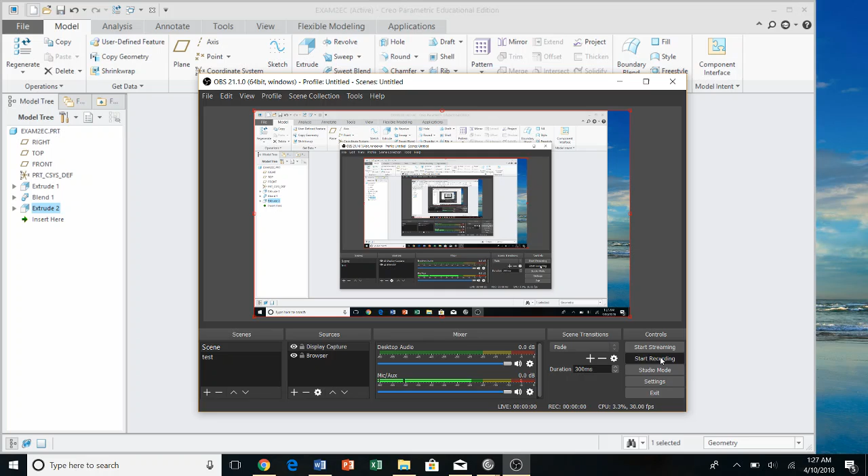To start, we're going to make a new part and call it the main body. We'll uncheck the default template and hit OK. It's an inches part solid, modeled by me, Joseph Telegadas. The description is main body.

To start, we're going to do an extrude. We'll click the top datum and bring it to sketch view. This will be the bottom of our main body, so I'll start with a circle, draw it, hit escape. That looks like it has a diameter of 5, so I'll dimension it correctly. There's a thickness of 0.5. That is good.

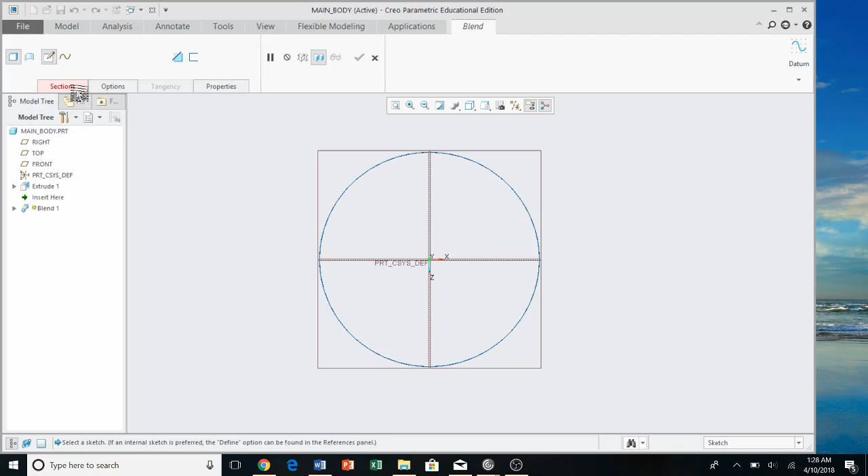Next is the blend, which is a hexagonal blend. We'll go to Shapes, Blend, hit Sections, and to define this item we'll click the top of this circle. If we go like this, it looks good. Hit check mark, cancel, yes.

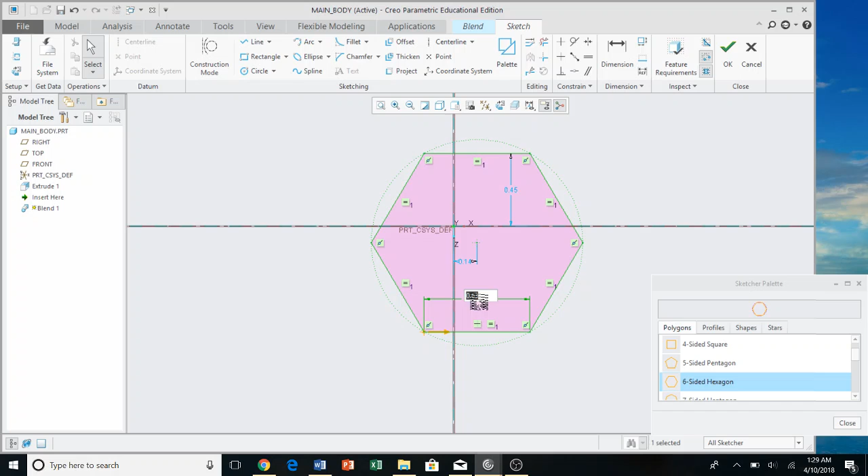In sections, we'll click Define, take the top, hit sketch, and bring it to sketch view. Then go to palette, click and drag this 6-sided hexagon onto here, hit check mark, zoom in, change this dimension to 1.5, change this other dimension to 0, then hit dimension, click the center, control click the axes, and middle click the mouse, type 0, which will center our hexagon.

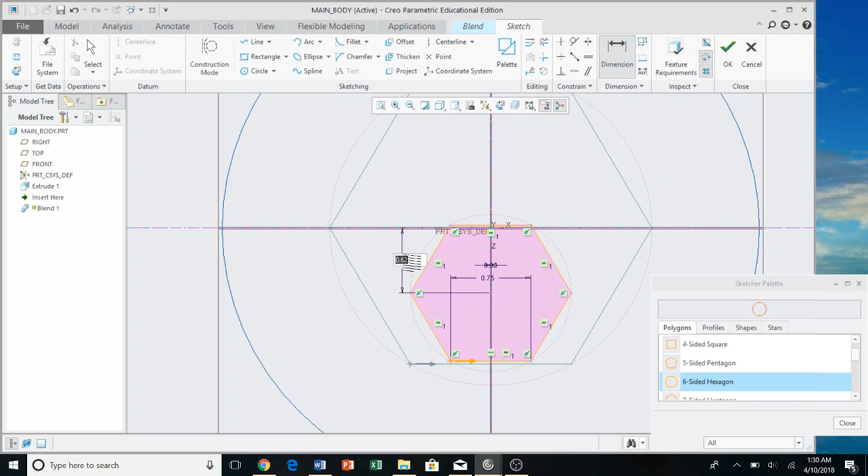Click OK. Now go to sections, section 2. It's offset by a distance of 3, to the center cross section. Hit enter, hit sketch, and again go to palette, 6-sided hexagon, click and drag, hit OK, dimension this to be 0.75, click OK, change this dimension to 0, hit dimension, center, control click the axis, middle click, 0. Check mark, that's looking good.

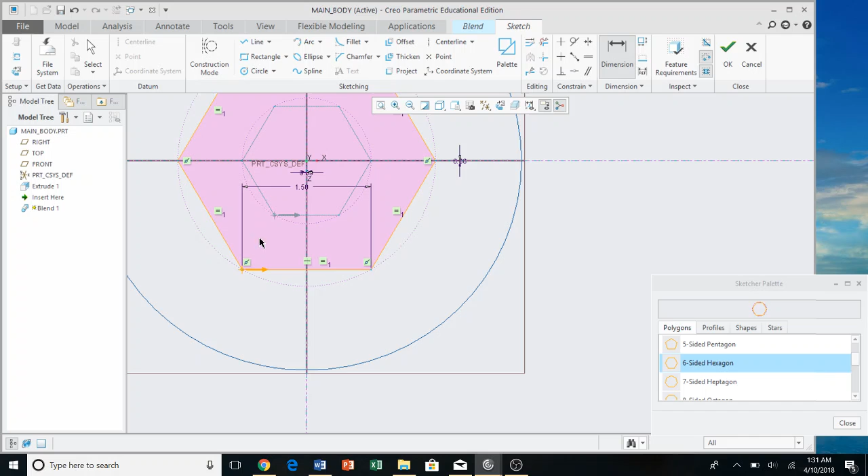Lastly, one more time: sections, insert, section 3, distance of 3, sketch, sketch view. That is weird. Palette, 6-sided hexagon, click and drag, check mark, again 1.5 as it's on the other end, this dimension 0, dimension, center, control, axis, middle click, 0. Check mark, good, okay. That blend looks perfect.

From here we're going to do another extrude. We'll click this top surface, bring it to sketch view. I'm going to add some references, reference this, hit close, and also add some center lines, just in case - always good to have. Click circle, come here, make it even with this circle, check mark, and the distance is 0.5. This will be our top end cap. Click OK.

Now I'm going to do a revolve. We'll select the front datum, bring it to sketch view. Now I have to add a center line - I'll right click and hold and designate this my axis of revolution, hit OK. Now I'm going to hit line and start at the bottom, hit escape. This has a diameter of 1 for that center hollowing - that's what I'm looking at.

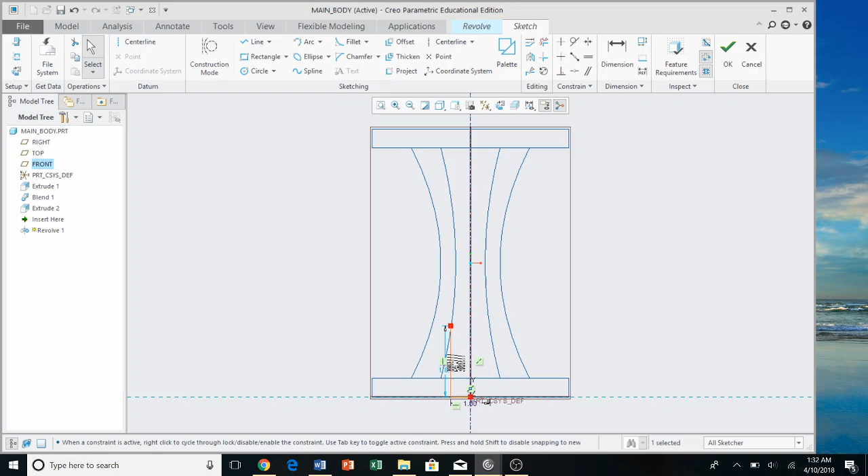Add another line, come up, hit escape. This has a distance of 2, because it's the 1.5 distance plus the 0.5 for the circle. Check mark. Another line, come in, click here, come up here, hit escape twice. This has a radius or diameter of 0.5. This has a length of 2.5.

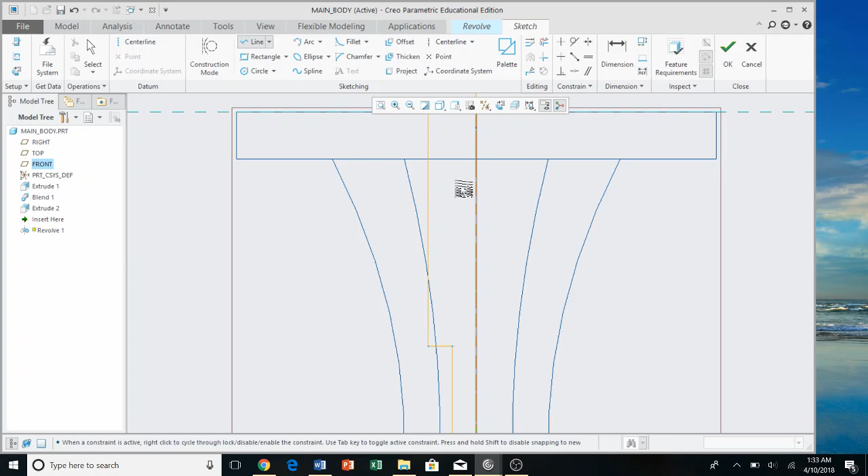Then we'll come up here, zoom out a little bit. Line again, we'll come back out, go up here, click, then come back to the center line, hit escape twice. It's 2.5. Dimension this - that has a diameter of 1, looks good. I'm just going to check this length to make sure it's right, and 2.5, so it looks good. Undo and get rid of that.

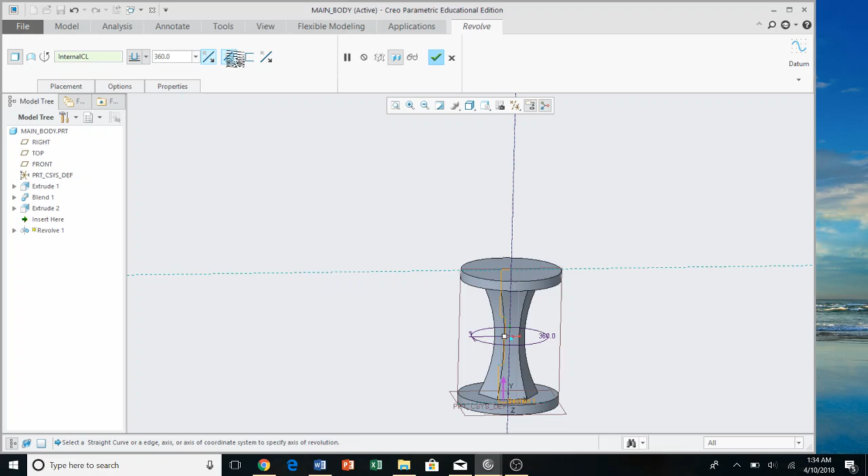This looks good, we're going to hit check mark. Let's see if we can get some shading - hit remove material, and that should make it. Looks good, check mark, okay.

Okay, so we've got to do one more revolve to make that divot in the top and the bottom plate. Again we'll go to revolve, hit placement, click this front datum again, bring it to sketch view. If we look here, the divot - we're going to go to no hidden lines. Actually, I'm going to cancel this, yes. I'm going to do the rounds first so we can see where to create our divots.

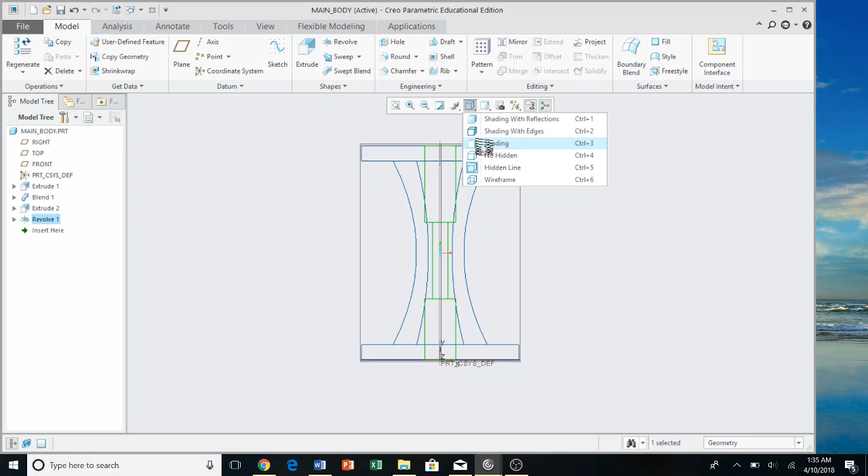So the rounds are very simple. We'll put shading back on, chamfer, shading with edges, click round, and we want the round to be 0.5. Again we'll click this edge right here - not that, it's not right at all. Now we're going to change this to 0.25.

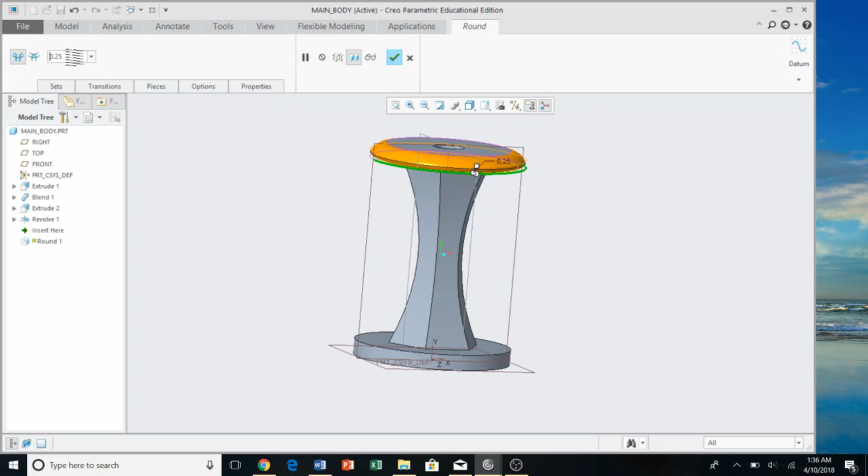That top one doesn't look good, so I'm going to cancel that. I'm going to hit round again, 0.25, and make sure to click this edge right here, and this edge right there, and down here, this edge, and this edge. Alright, that looks good. Check mark. Alright, cool, that looks good.

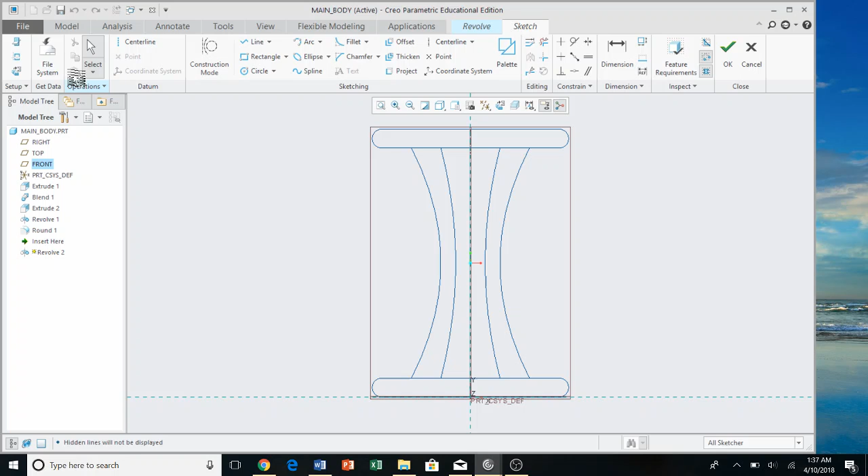Like I said, we're going to do that last revolve for the divot. So click revolve, front datum, bring to sketch view, no hidden lines. And then the divots are at the top and the bottom, and they look like they have a 3.5 references.

They are radius. Here, come up here, here, and click down there. And close that. Hit escape.

Ooh, and we have to right click on this center line. Actually, add center line. Designate this the axis of revolution. Okay, alright.

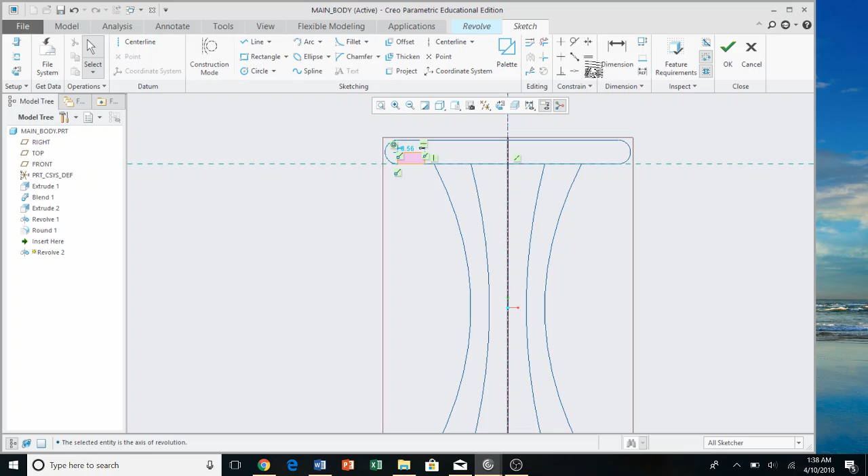So the inner circle of these divots should have a diameter of 3.5. Down there. And this should be 3.5 for this diameter.

We're going to delete, delete, delete, delete, and then redraw this box here. We're going to start here, go up to the center of this round, come over here, come down, and then come back over, escape twice, and now we see that that is even with this one here.

If not, you could dimension it and make sure the distance to the center line is so it has a diameter of 3.5, but we should be good.

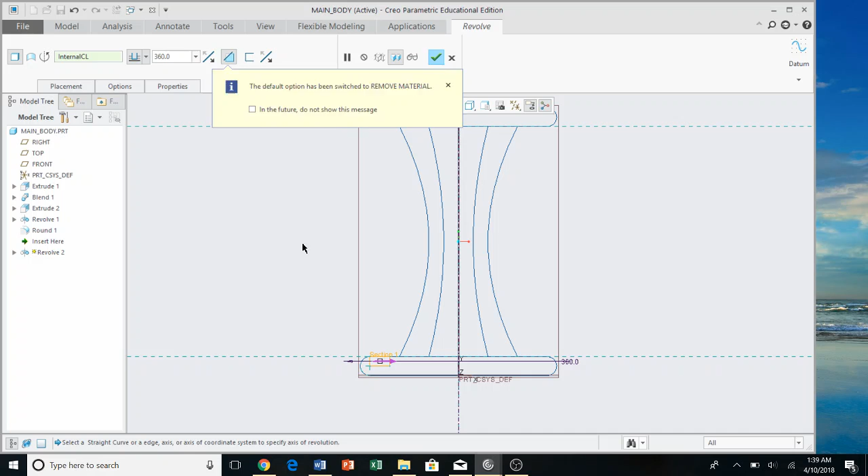Click OK. Default option has been switched to remove material, so let's turn on shading to make sure this has a good look, and that looks like what we want. So now we're going to click OK.

Alright, so a couple last things for our engineering drawing. We have to add some planes to do the revolve view. So we're going to go to View Manager. Actually, we're going to go to

Plane, the datum plane, and we're going to click the top datum offset, and we need one at the center, so that is going to be 0.5 plus a distance of 3. Looks like, trying to see on the drawing here. So 3.5. Click OK. That looks good.

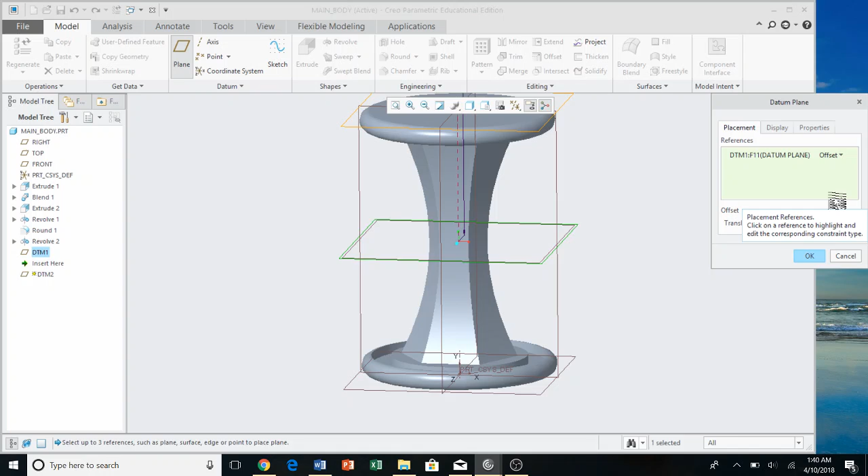And then plane, and then it's going to be offset from this datum, but it's going to be a distance of 3. Okay, there we go. So we've added our two planes to do our revolve views, and now we're going to add the section to do the quarter cross section.

So that is section AA. So what we're going to do, we're going to click View Manager, Sections, New, Offset. We're going to call it A. Okay.

So we're going to select the top as the sketch plane, hit sketch, bring this to the sketch orientation, no hidden. Alright, and we're going to draw a line from here to the center and out, and hit escape, hit OK.

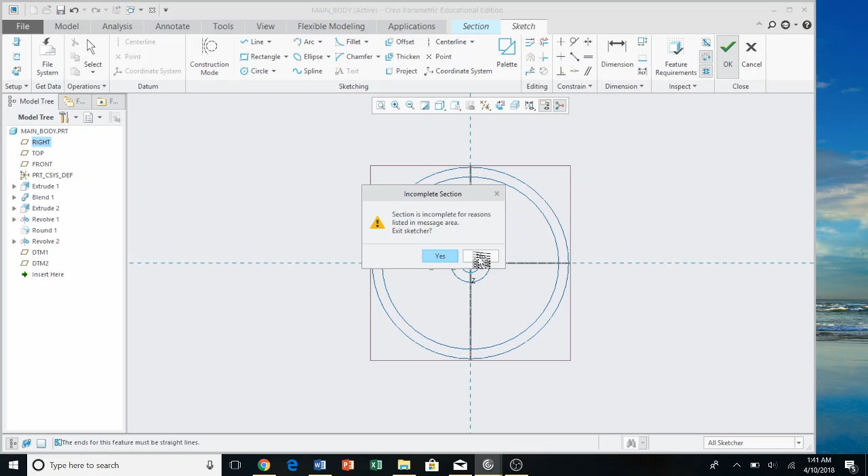Okay. Alright, now we have that, but we want to reverse the direction, so we're going to click this here. And that looks good. We can see we have our cut just like in there.

And click OK. And now we're also going to create a new orientation for this, so that it matches what we have on the engineering drawing.

So we're going to rotate it like this, and then we're going to hit Orient, New, and we're going to call this Section View. Enter, okay, and hit close.

And now this is the main body completed. So we're going to hit save, and that'll be okay there, saved in that folder, click OK.

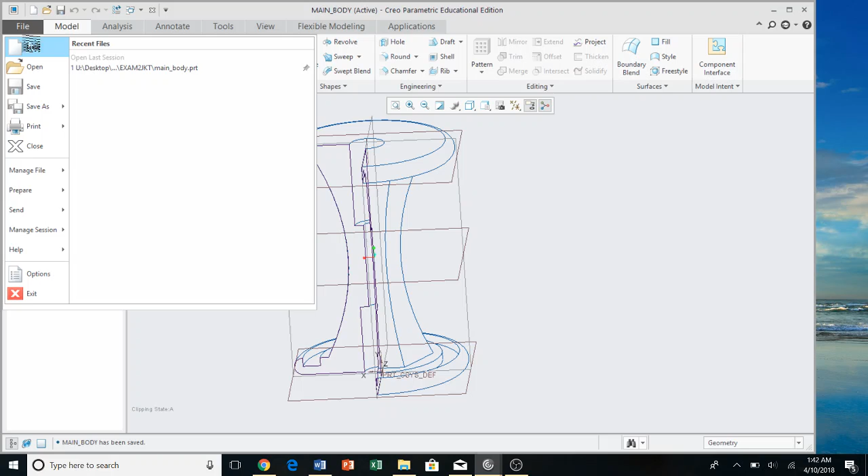File, new, drawing. We're going to call this main body. Uncheck the default template, hit OK. Empty with format, browse. And if we go to our working directory, select the Spring format and hit OK.

Alright, so now we have to get our general view. Alright, general view, OK. And we're going to click somewhere down here. This looks good. We want the front, apply.

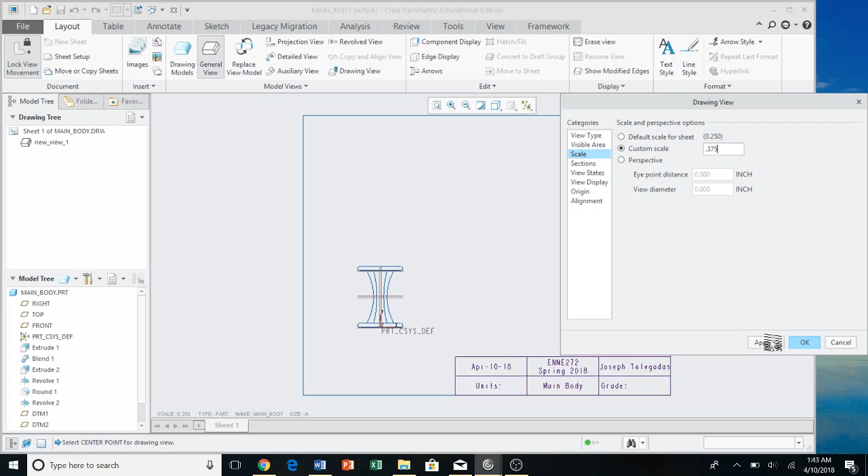OK. If we go to scale, custom scale, 0.375 should do. Apply. Okay, we can uncheck. Actually, we want to leave this checked right now. Alright, we want to add hidden lines and repaint that.

Alright, and then go right click, projection view, come up top, and we can click, and we have our projection view.

From here, we want to add general view. Okay, click again. And this time we're going to do our section view. Apply. Then we're going to go to sections.

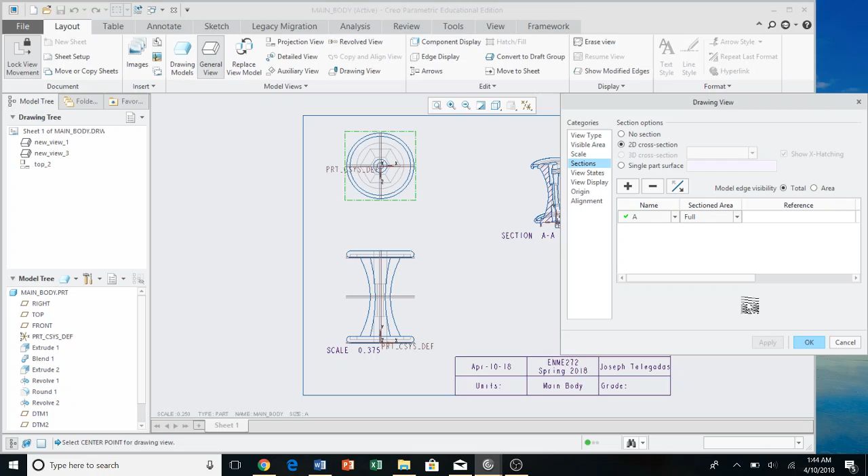Sections, add A. Okay, apply. And that is the inverse of what we wanted. We can hit that and change it and click OK. So now we have that section. We might change that view a little bit later. Oh, and right click, properties.

Make the scale 0.375. Apply that. Okay. I'd like to see, and this should also have no hidden lines on it. So if we go here, view display, no hidden, apply that. And then if we go to view type, let's look at the default.

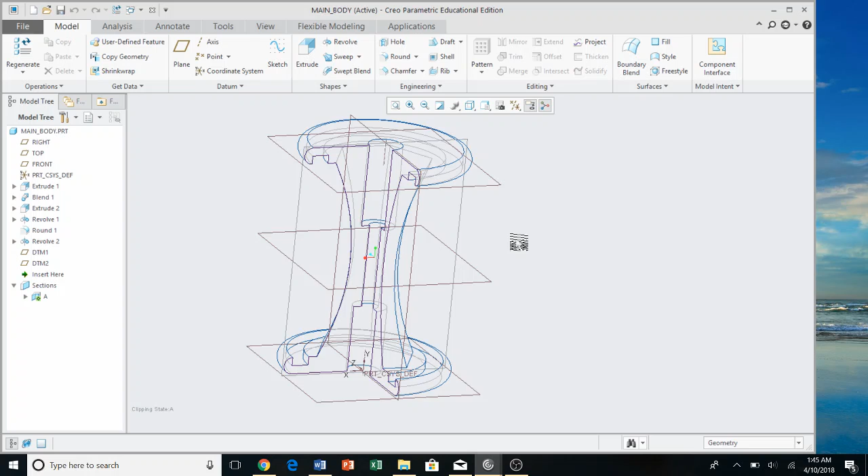No, that's not good. Alright, so we're going to go, okay, so we're going to come back to our part, and we're going to rotate it a little more. Try and get this to line up a little bit better with what's on the test. Okay, that looks a little better.

View manager, call this new section. New. Hit OK. Close. Save. Alright, come back here. Go to the main body. Right click. Right click. Properties. Section new. Apply. Alright, that looks good. Okay. Alright, so now we have this.

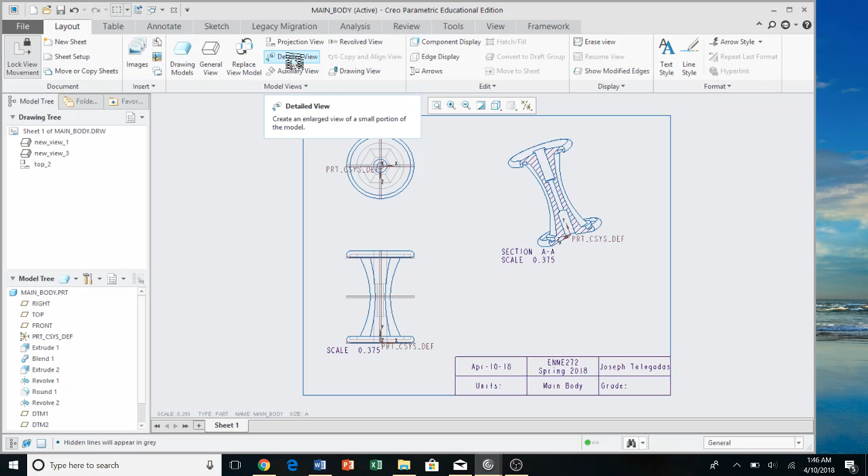So we're first going to add a detailed view. This is detail A, so we click that. And click the center point, which looks to be about here. And then do a bunch of small clicks and draw a circle around this. And hit enter. And middle click.

Yes, finish the spline, right click. Yes, finish with the boundary definition.

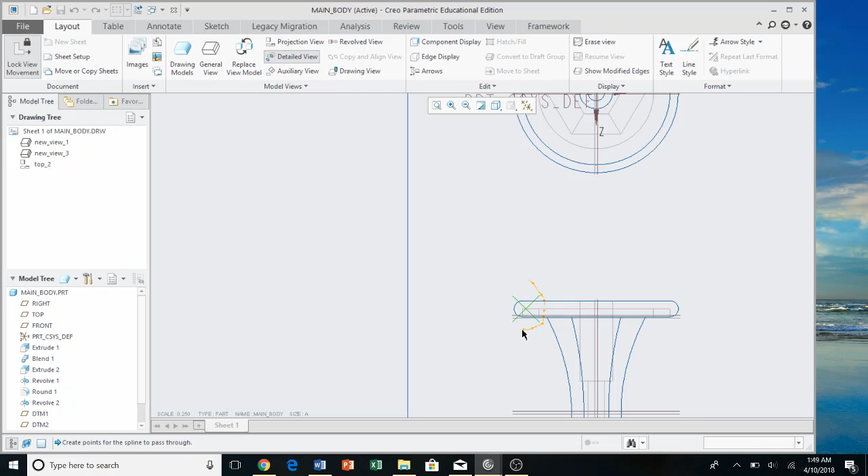And that looks like we cut it, so we're gonna delete that, and we're gonna try that again. So we're going to center click where we want our detailed view to be. Draw a circle around to make sure we get that divot in there.

Middle click, and then click over here for our section A, and that looks good. Section A, and then we want to go to properties and change this scale to 1.

Okay. All right. And we can click unlock movement. We're gonna move this over a little bit so that we can get that detail on the page. And we can move this up a little bit. All right. Okay.

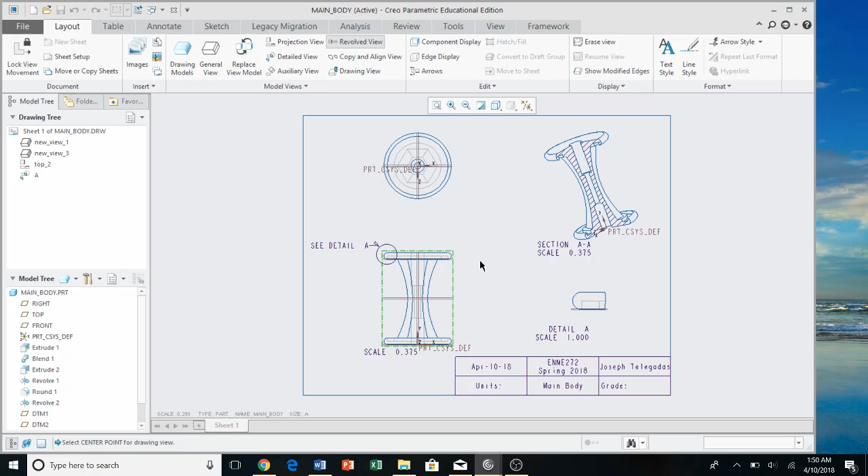Now, the last thing we're gonna do these revolve views. So we're gonna select this as the parent view. Select this as the center point. Revolved alignment reference. Planar, single done.

Name, cross section, we'll say B. Plane. And we want to click this plane that we created, and there's the 1.

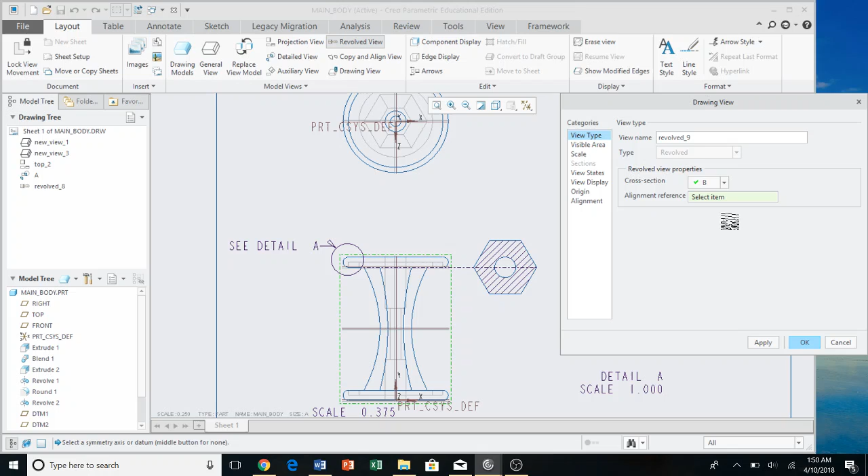Okay, and then do one more revolved view. This is the parent view. Select center point for the drawing view. Cross section. Create new. Planar C. Done. Type in C. Hit check mark. Plane. Click this one, and there we go. Apply it. Okay. All right.

From now here, it's just a matter of doing some dimensions. So if we go to annotate, dimension, also we're going to get rid of these. We don't need them anymore. Dimension, so this, 5, middle click, orientation, change this to diameter, and then change the display. Flip these arrows. All right, looks good.

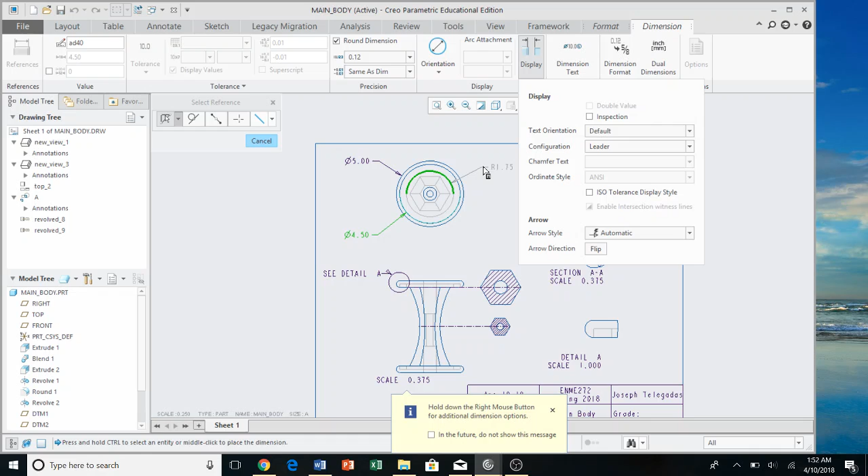Next thing we can do is this inner radius right here. Same thing. Click diameter and flip these arrows. All right, and the last one is this radius right here. All right.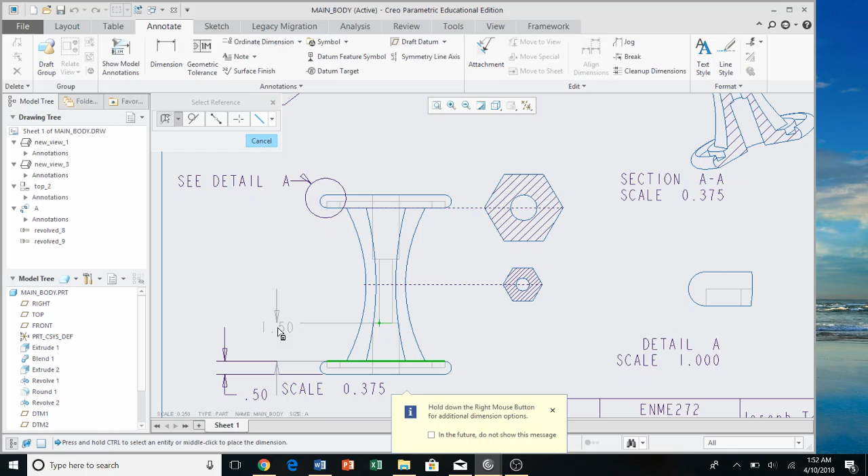There. See. Cancel. Go back. Hit dimension again. I'm gonna do and come over this down. Middle click, that looks okay. Now this side to this one. Yeah, misclicked. Alright. This to this 1.5 right there.

Display, flip these arrows. This to this. And this to this. Alright. What else do we have to do?

Dimension this side length. 0.5. Flip these arrows and this side length. Looks good. The center.

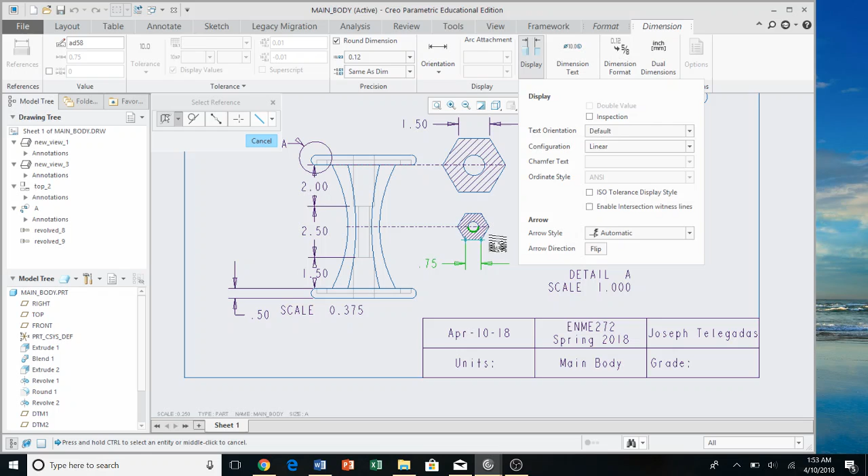Alright, sorry. Dimension the center. Then of course we want to make that a diameter and flip the arrows again. And same with this one. Alright. That looks good. And the last thing we have to dimension is on our detailed view.

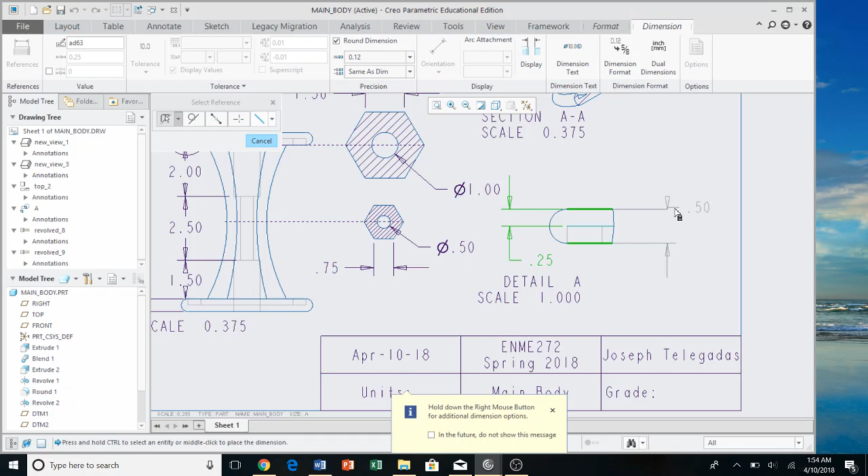So this length to control, click this one. This entire thing. I want to flip those arrows. And then dimension the last part, which is the round. Alright.

And then the last thing it looks like we need to do is add our center lines. So if we go to, cancel that. Alright, if we go to annotate, show model annotations, click on this thing, come over here, and we can add one of these center lines, click apply, cancel. And now we can click and drag this and make it go through our whole model.

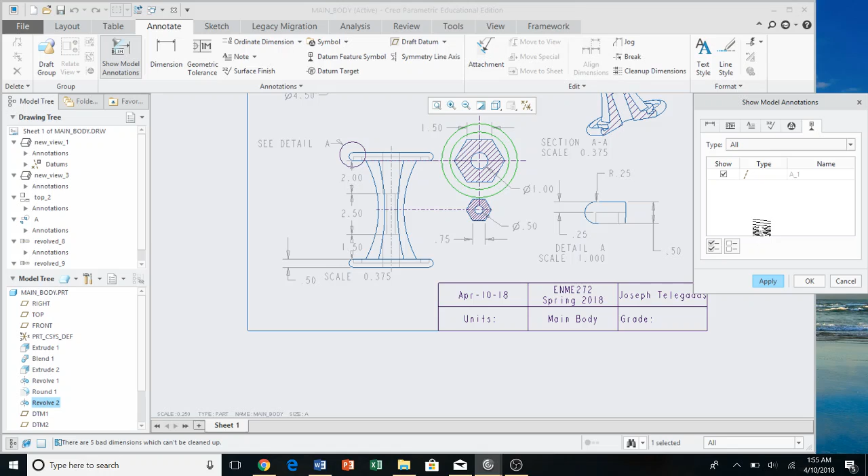Show model annotations, click on this thing here, add this center line, apply, cancel, shorten these a little bit.

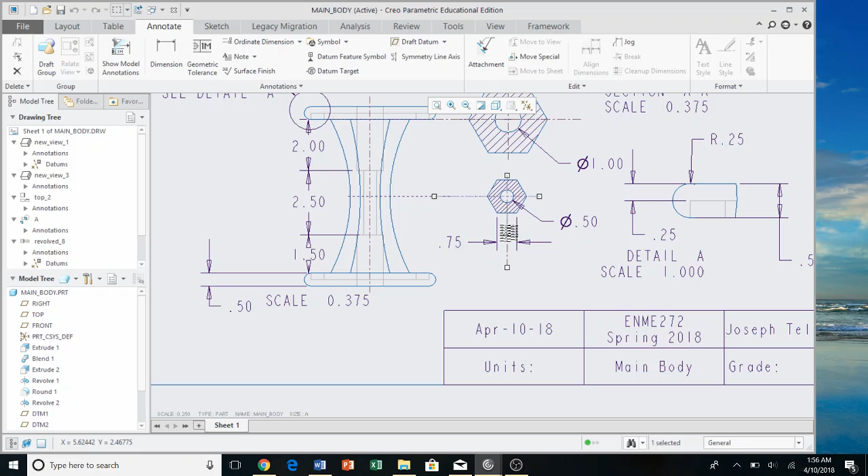And then show model annotations, click on this one. Apply that. Okay. And again, shorten it a little bit. Also going to shorten that a little bit too.

Alright, cool. Alright, recenter, and then we need one more center line on this one. So you know the drill. Check mark, apply, okay. Alright, that looks good.

Alright, so this is all for problem 1. It's the main body. We're going to save main body drawing. Okay. Alright, so now we have to make the second part, which is going to be our spring. So file, new, part. I'm just going to call this spring. Click OK. Alright, and then we want to recheck all these so that they're displayed.

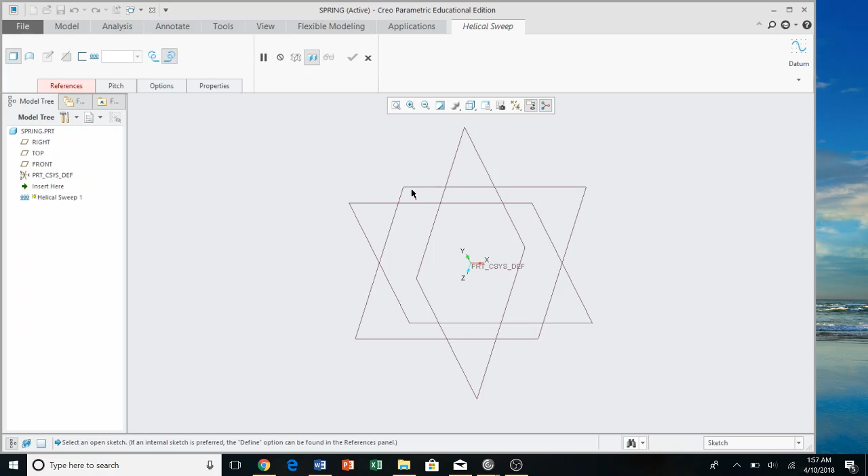Alright, so for this one, we are going to click sweep, helical sweep, references. I'm going to select references, define this datum, bring it to, and hit sketch. So we're sketching on the right datum. All right. So now section has been rotated.

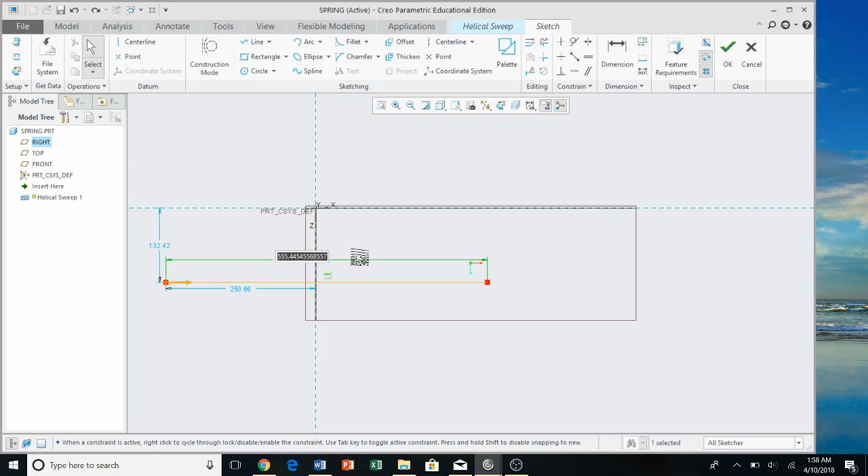What we're going to do is sketch a line. So we want it to have a length of 6, and this is going to be the trajectory for a helical sweep, with a radius and a length of 6.

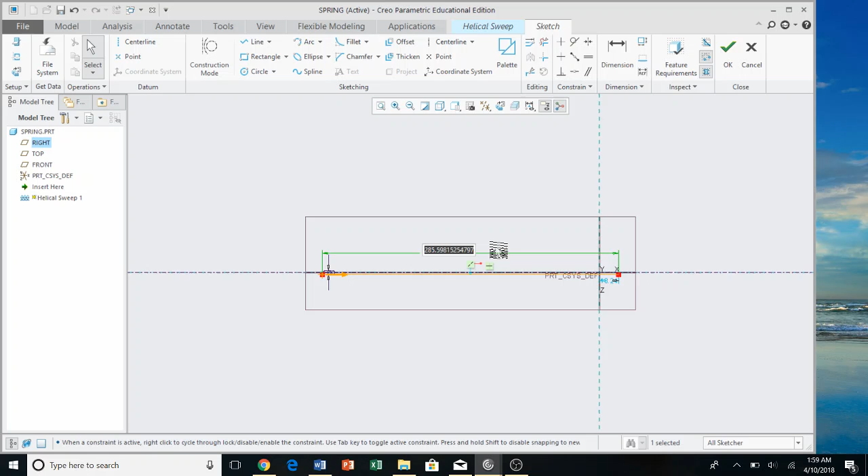Alright, so we're going to references, define this reference plane again, the right plane, and hit sketch. Designate an axis. We're going to make a center line to designate it as the axis of revolution, then sketch a line. It needs to have a diameter of 4, a length of 6. Make this 0. Click OK, and this is the path that we're going to follow.

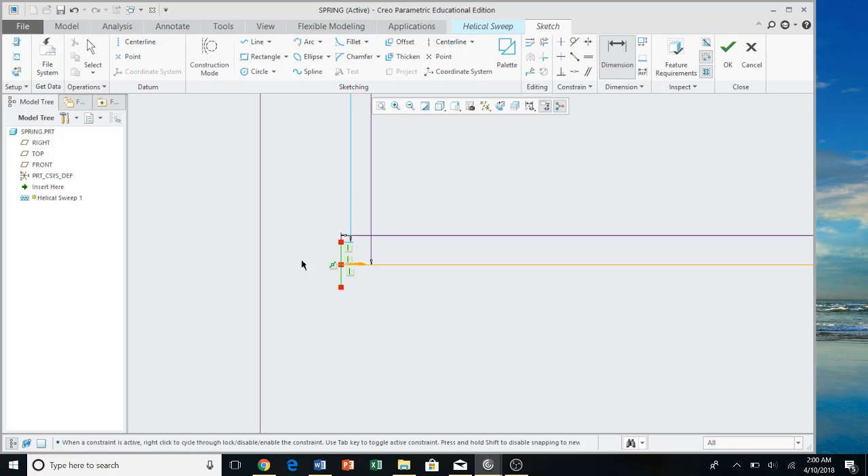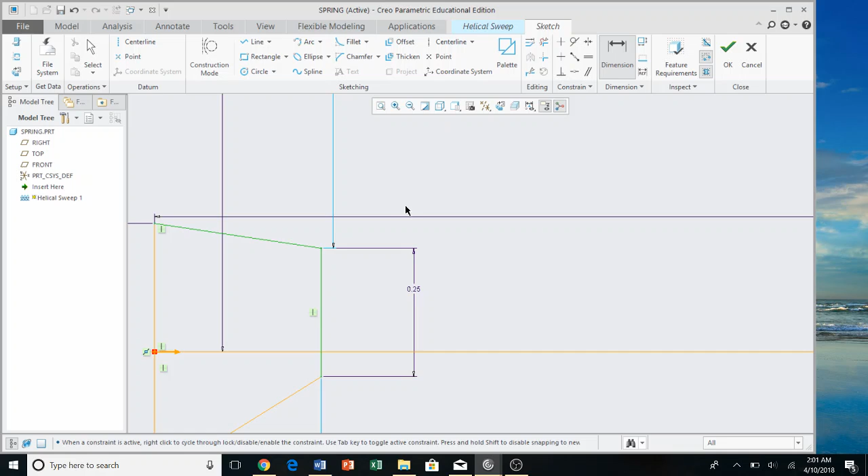Okay, and our line is going to be, dimension this, 0.5, and another line right here. Dimension this one to be 0.25. Then we're going to connect them, and we're going to dimension this angle so it's not going to be 110, so it's going to be 180 minus 110.

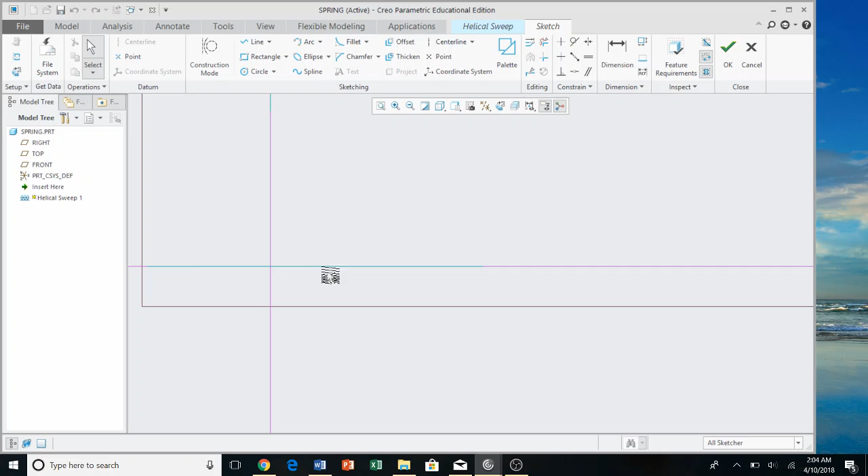Trajectory starts right here. So what we want to do is create a line that is 0.5, a trapezoid. I'm going to close it and hit escape, escape.

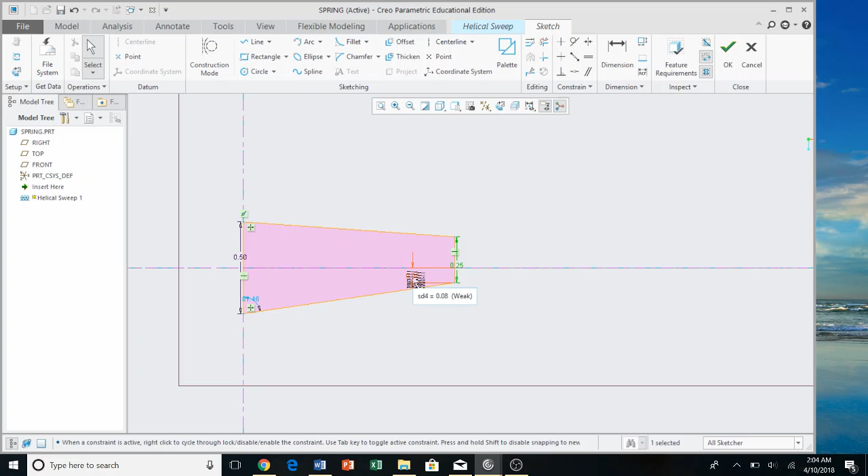Alright, so now we have some math to do. So this is going to be 0.5, and this is going to be 0.25, and this is going to be, looks like it's going to be 0.125.

And then from here we're going to dimension and make this—alright, so if that is 110, that's going to be 70 degrees. And that is the right cross section. So we're going to click OK, and now we have our sweep. And it looks right. Alright, check mark.

Okay, and we're going to save this, and we're going to call that spring.

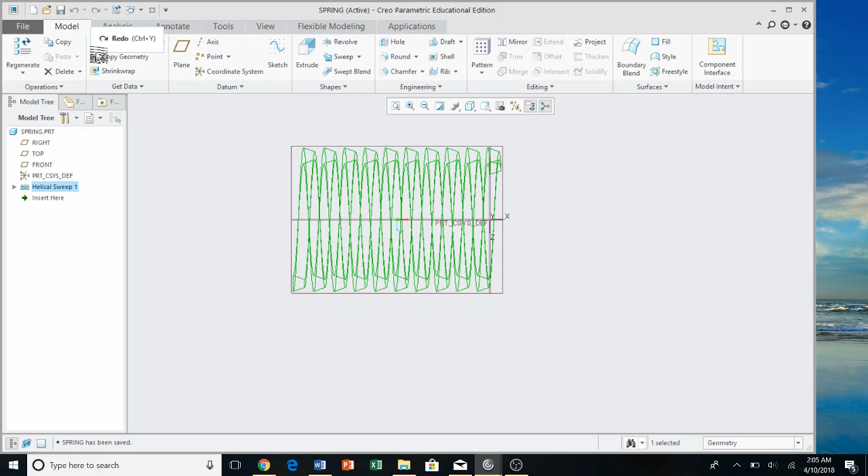So now we have to make the assembly, which is not hard at all. So we're going to do File, New, Assembly, name it Exam2ASM. Don't use the default template, click OK. Modeled by, again, my name, Joseph Telegadas. And description, Exam 2. Okay.

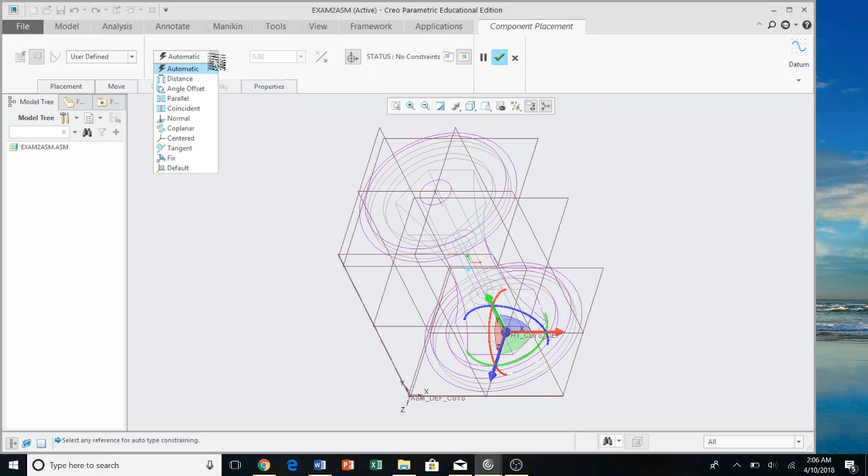Alright, so now we are going to click Assemble. We're going to bring in the main body. And this assembly isn't too hard. I want to have this fully constrained. I'm going to go fix. Check mark, okay, and then assemble.

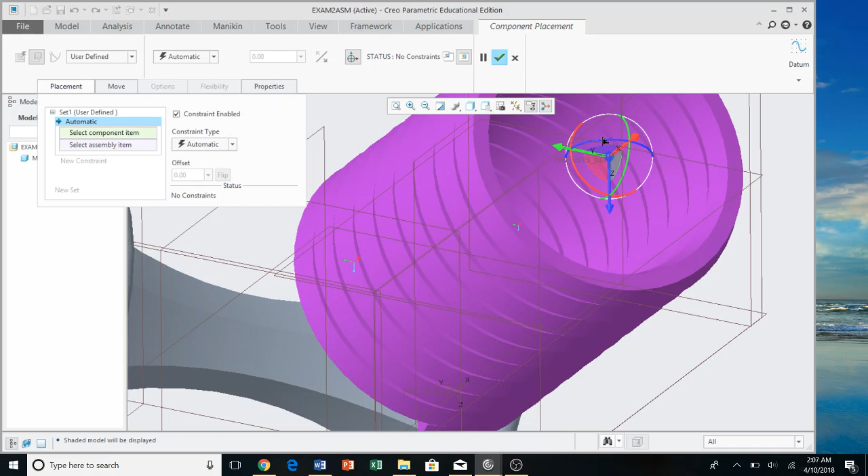Spring, open. And placement, select component assembly, so we're going to go here. Let's find—I'm just trying to see it. Center line, center axis of this thing. Alright, so I'm going to click this plane, this plane, I'm going to make them coincident, and make a new constraint.

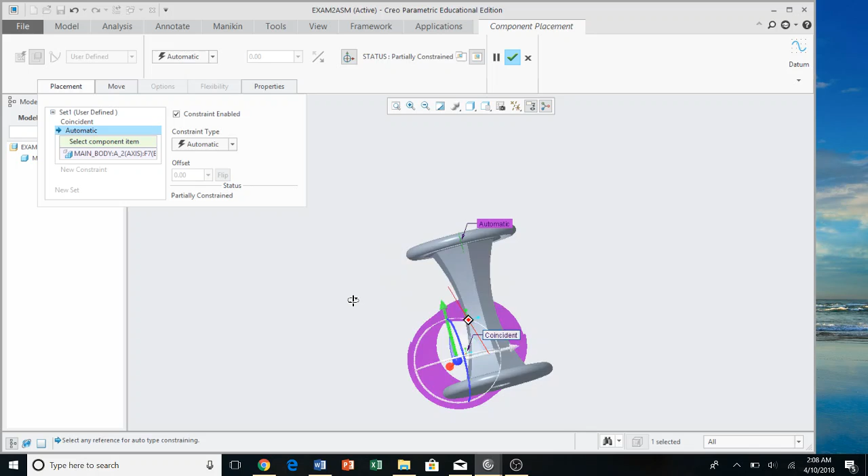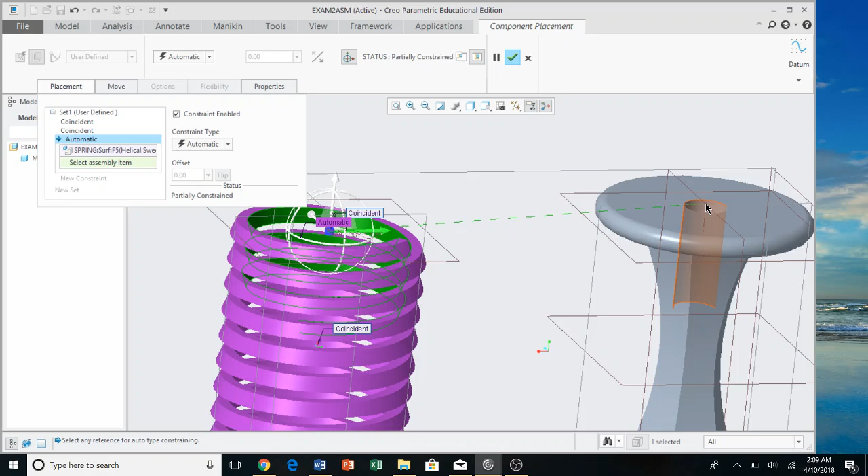Plane, this plane, that's a coincident. And then the last thing, constraint. And click the, get this axis. I'm going to cancel this.

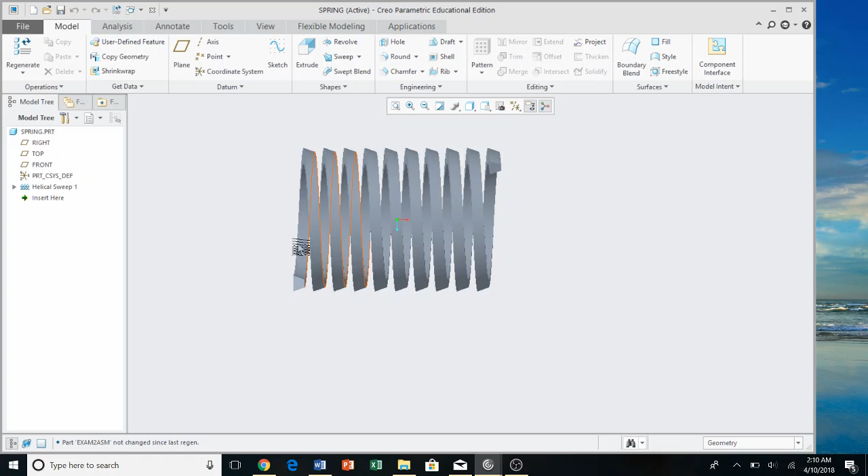Alright, so I need to get the axis on my spring. So if I'm going to open up my spring part, the axis, I go here and select all references. Click this one, and control, and click this one, that axis. Okay, and now that adds an axis there. So if I save that...

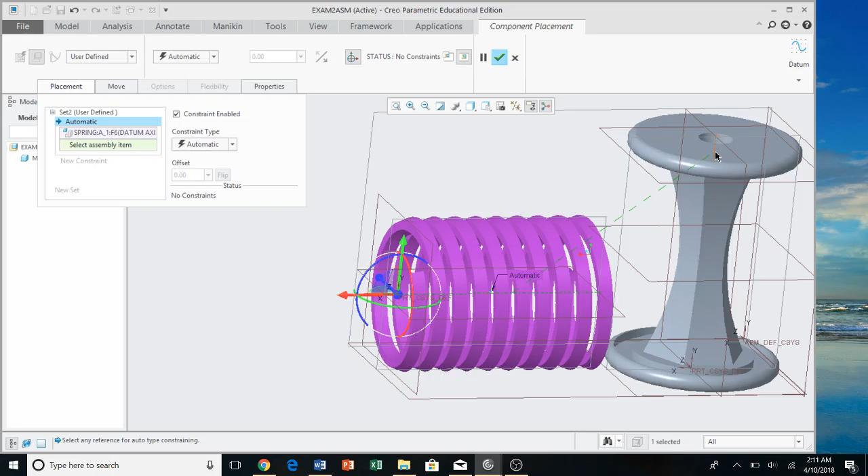And now I go back to my assembly, and I add a new component. That has an axis there. So now I can click placement. Alright, so now I'm going to click this axis, and this axis, and I'm going to make them coincident. And then I'm going to make a new constraint. Click and drag this and line it up.

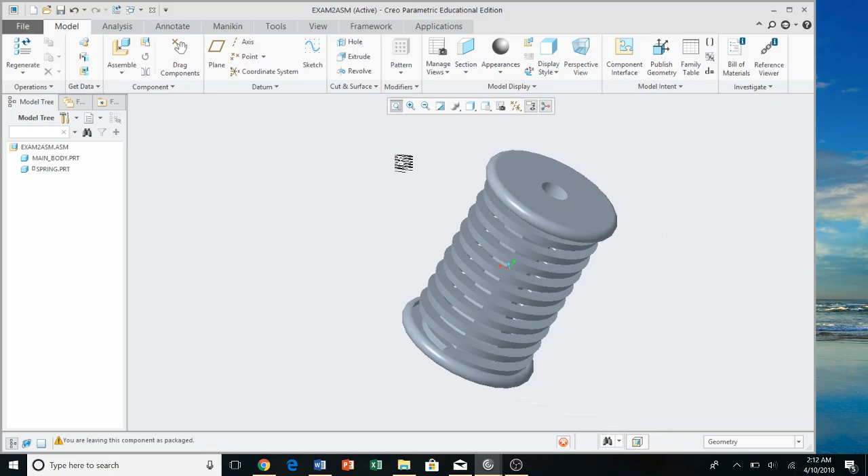And if we look at our drawing, that looks good. The spring is supposed to be inside. Check mark that. Alright, and recenter.

And now we're going to save this orientation for our drawing. So if we go to View Manager, Orient, New, call this Assembly View. Hit...

Okay, hit close. Now we also have to do the exploded view. If we go to Edit Position on the exploded view, we can click on this, drag it out, recenter the screen, drag that a little more, drag this down some. Hit check mark, default explode, save that, okay, update default.

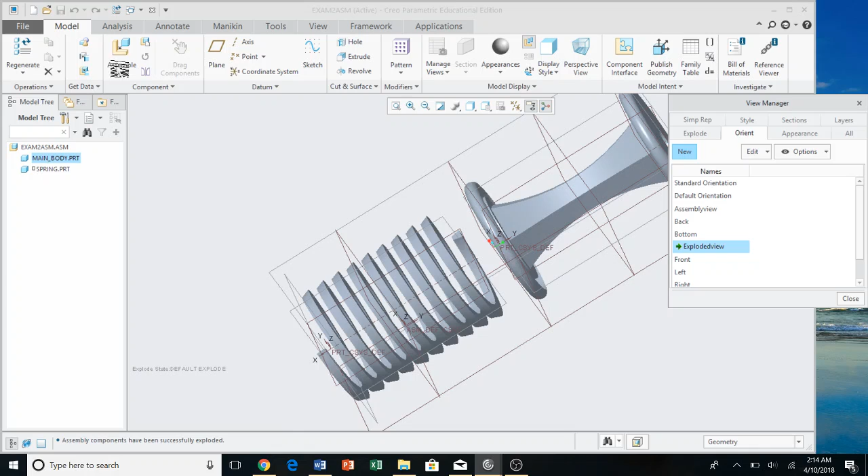Alright, and then go to orientation, save this assembly view, okay, then new, this will be called exploded view, and hit close. Alright, oh, cancel, and hit enter. Alright, cool. So now close that. Alright, and we can hit save.

Alright, and save that. So the last thing we're going to do is go into our individual parts and add parameters so that we can create our bill of materials when we go to our drawing. So if we go to our main body part, go to model intent, parameters, and it looks like we have to add part numbers.

So add, I'm going to call this part number, and we are going to do string, and then for the main body it's A001. Hit check mark, click OK.

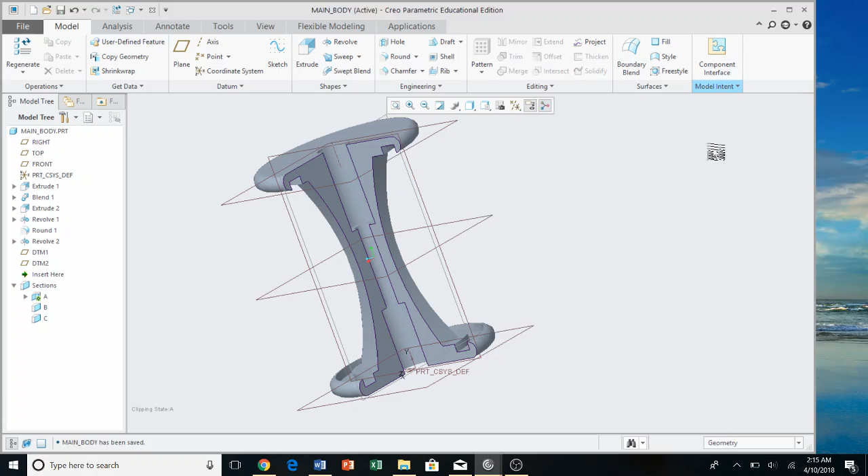And then we want parameters, add part underscore name, again string, and this is main body. Check mark, okay. And come to our, oops, my bad, close that.

Come to our spring and do the same thing, model intent parameters, add part underscore no, we have to make sure these are the same, string A002, check mark, add part underscore name, string, spring.

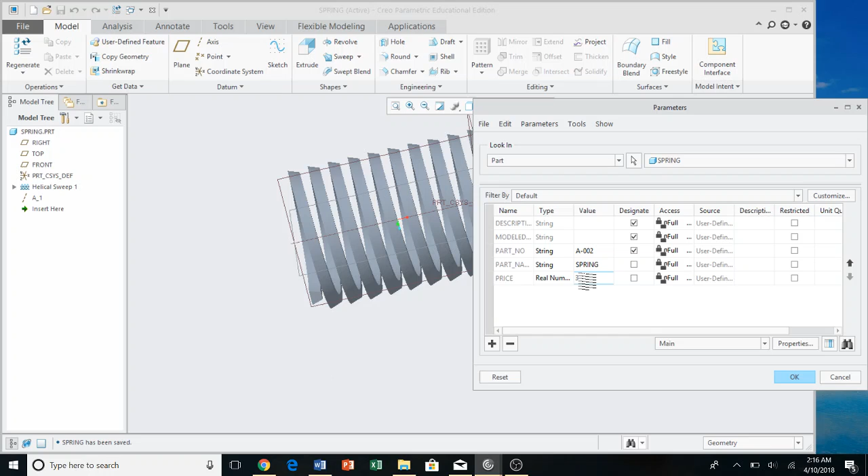Oh shoot, I missed price, so we gotta add price. This is a real number. And this spring is 15. Check mark, okay. Alright, so save that.

Alright, come back here and go to our main body, model intent, parameters, add price, 350. Check mark, okay. And save.

Alright, so now we're going to go back to our assembly, file, new, assembly, call this exam 2, use default template, okay, modeled by me, description, exam 2, okay.

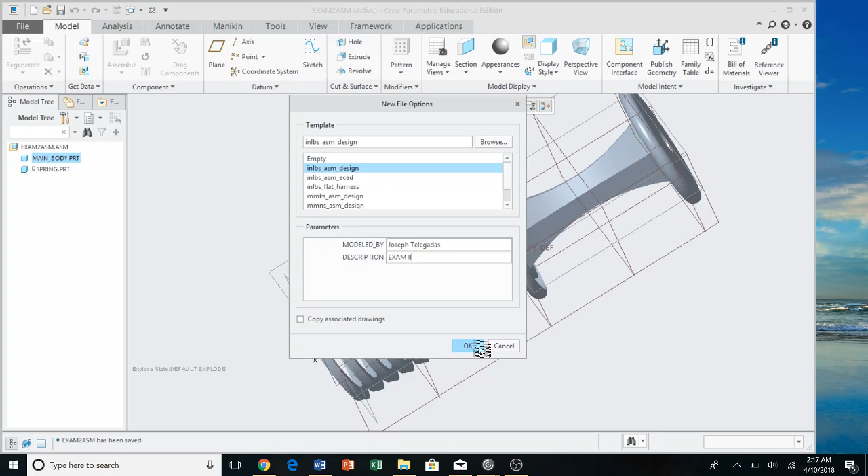Oh shoot, did I click drawing? Whoops. File, new, assembly, no, drawing. Whoops, my bad, alright, I'm a little tired. Exam 2, draw. Use default template, uncheck that.

Format, okay. Alright, and now general view. Okay, click there. Assembly view, yep, that looks good. Scale 0.625. Alright, looks like we are in business.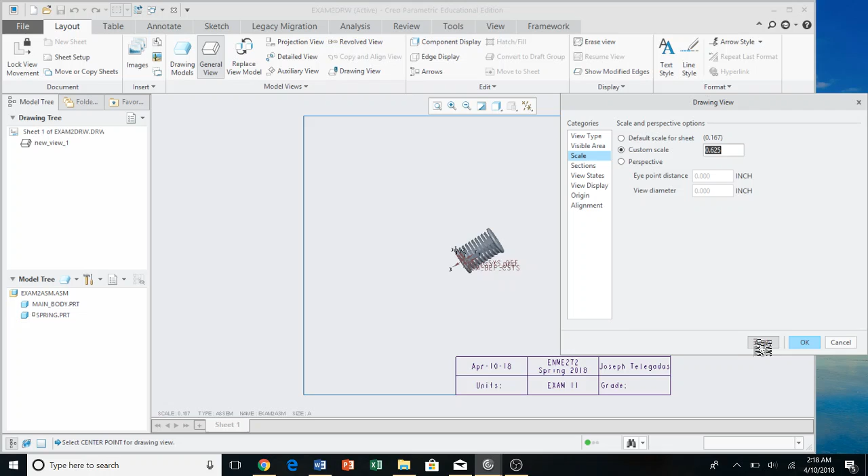Okay, uncheck all these, and we want no hidden lines, like that.

Alright, so now we want to add a bill of materials, so we want to go to table, insert table, and we want to click, and it does give me the position. Let me find this real quick.

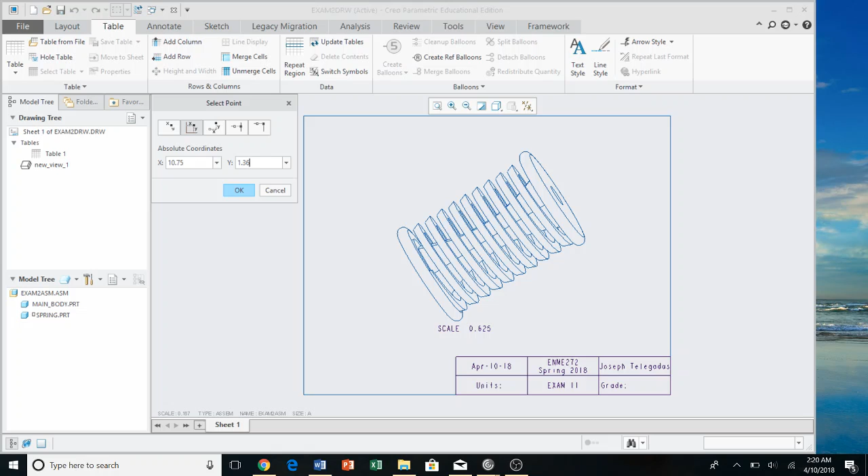Let's say I look this up. All right, it's going to be a 2x5 table, which is 5 columns. Click OK, and select the absolute coordinates. And this is 10.75 and 1.38, okay. Alright, so now we're going to go here.

We're just going to type in some of what the table has in it. So index, part number, part name, price, let's click there, price, and quantity. Alright, no, don't hit enter. Oh, that's not good.

Alright, okay, repeat region, click add, repeat region of the table, so click this one, and click this one, and click, we want it to be.

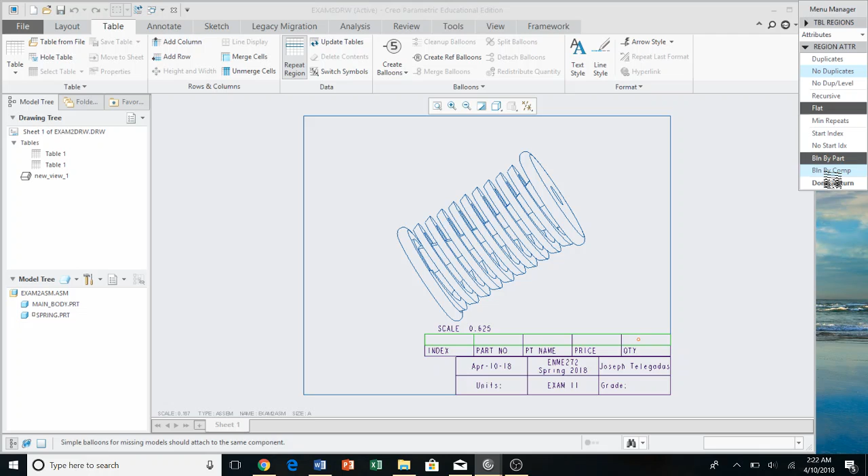We go to attributes, no duplicates, flat, and turn, done. We're gonna click and drag this over here.

Alright, so now if we come here, and for this first one, it's an index, so it's gonna be a report index. This one's gonna be report quantity. Part number, we're going to go here, ASM member user defined, and type in what we typed earlier, so part underscore number, hit OK. For this one, ASM member user defined, part underscore name, and last but not least, ASM member user defined price.

Hit check mark, and then we have to hit update table. And looks good.

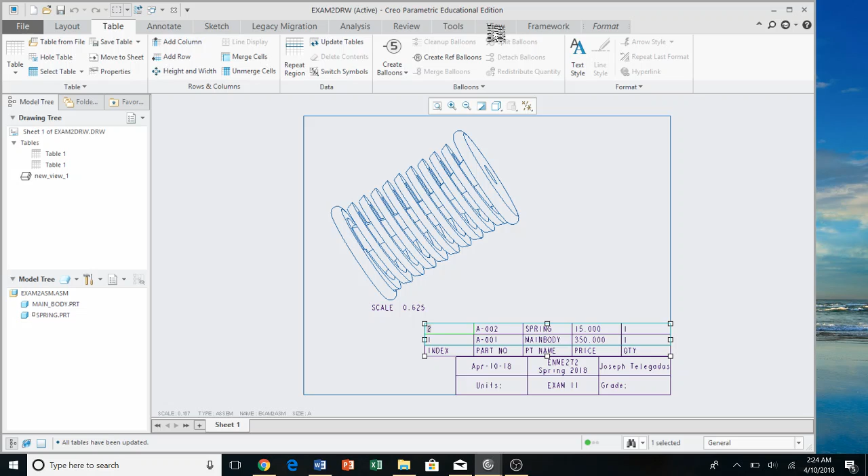So now we want to make sure everything is centered. Table, format, center everything.

All right, and we are going to edit this table. Format, font, properties, text, height and width, and we're going to make this a little shorter. So width, characters, we're going to make that 4. Okay, let's see what that looks like.

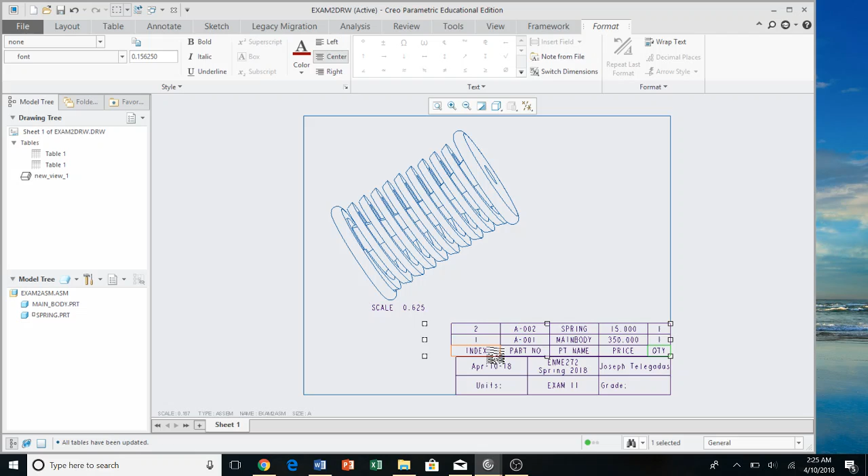Let's take off a character on the index, let's make that 9. And that looks good, alright, so bring this centered.

Let's go over here, and the last thing, create balloons, create reference balloons. Okay, and we want to adjust the position of this reference balloon to format.

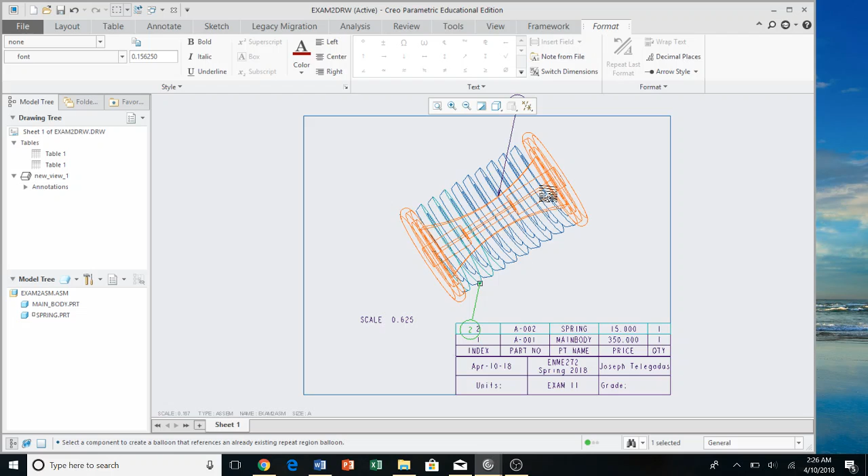We go arrow style, fill dot. Edit attachment. No, we might have the lock on. Locking it, unlocking it, okay.

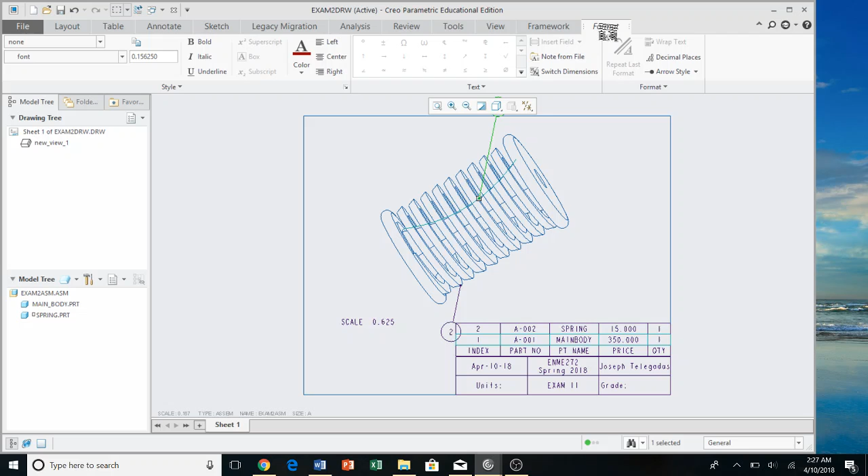Leave that there by hitting edit attachment. Oh, there, almost had it. And click and drag this over here. All right, and lastly, click this one and click and drag it, move this over here. And that looks good.

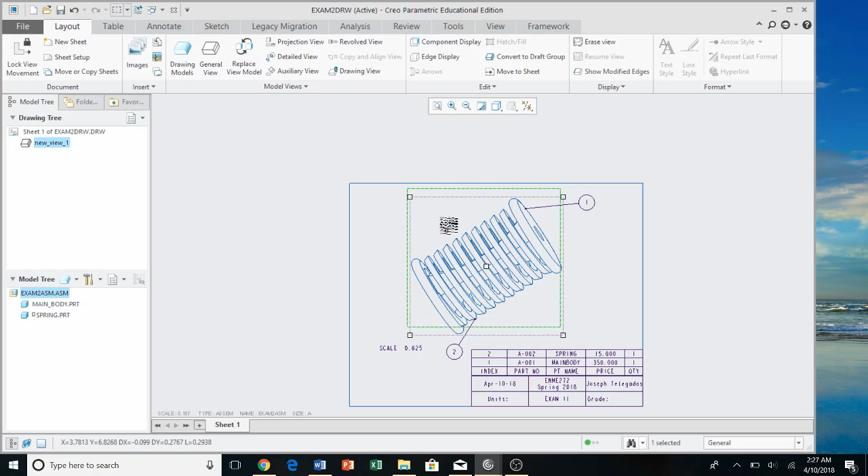All right, and all we have left to do is the exploded view. Sheet 2, general view, okay. Exploded view, apply, sections, view states. Exploded components, view default, apply, okay.

And then scale is 0.5. Okay. Alright, so this one looks good. This sheet looks good, move everywhere, and then

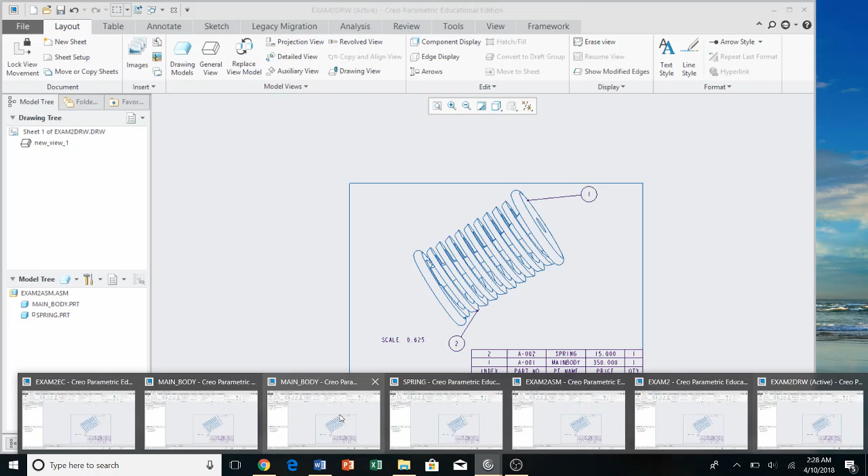lastly, go to the main body drawing. Everything looks good. One last thing to do for the main body drawing: move these out a little bit.

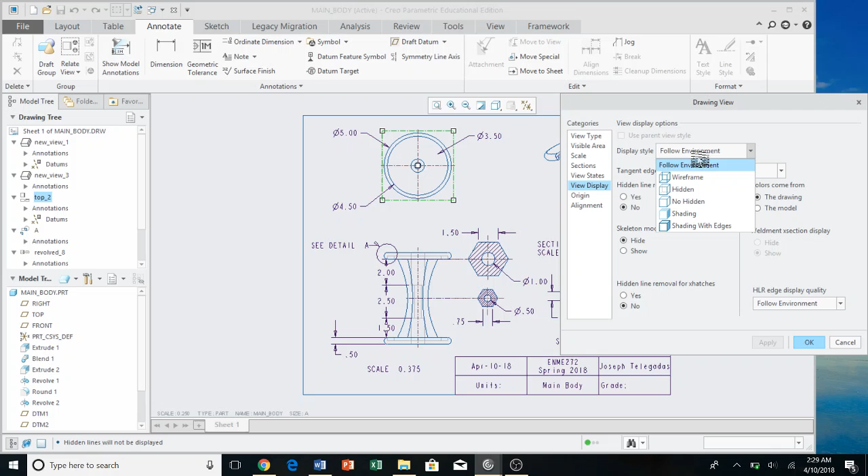Make sure that these properties, make sure that this view states, view display has hidden lines on it. Same with this one. Alright, so this is hidden lines on it. And let's make sure that didn't do anything. See these sheets? Nope, it's okay. Okay.

So, and the last thing we have to do, if we go File, Prepare, Drawing Properties, change the detail options, arrow style, and change these to fill. Add change, apply, close, and repaint. Alright, looks perfect. Alright, so this is problem 1 completed.

And here's the drawing from problem 2 completed. Both sheets with the bill of materials. Thank you for watching.